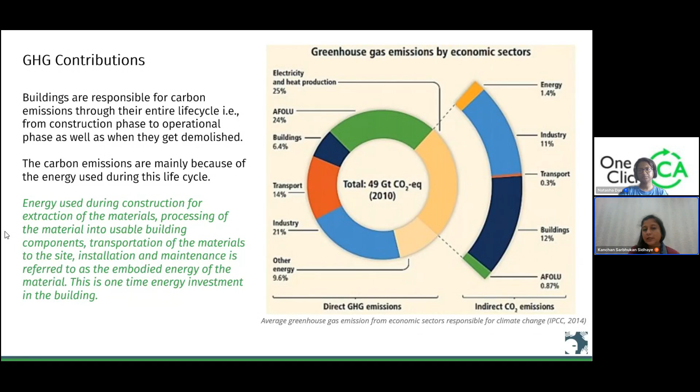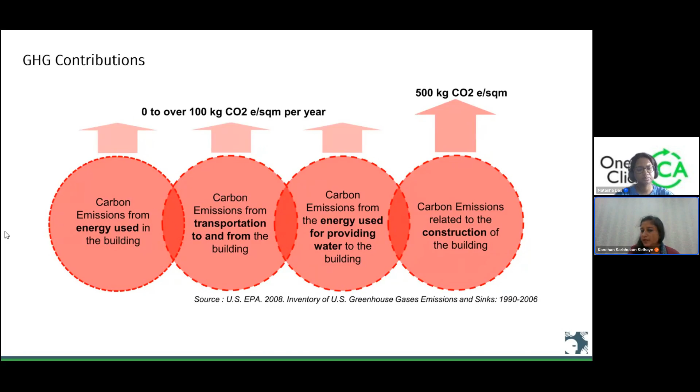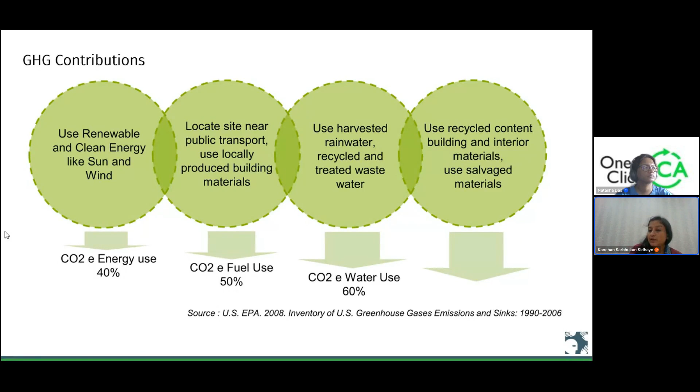GHG contributions in the building construction sector are caused by energy use in buildings, transportation to and from buildings, other resources like water or waste management, and the construction of the building itself. We can reduce this through clean energy offsets, using public transport, using more harvested recycled water, and in case of building materials, using more recycled content and more information on the CO2 footprints of these materials.

The life cycle assessment, in plain words, is an assessment based on a specific method of calculation governed by ISO standards 14040 and 14044, offering a scientific way to assess and start mitigating climate change. So one may say it is a first step, and carbon footprinting itself, as one of the parameters, becomes the first step as part of the LCA.

I would talk about the benefits and how to really use the LCA in real life scenarios. Typically, you will find a lot of product manufacturers, equipment or technology manufacturers talking about the life cycle impact of their product in a positive reference.

So how can one use an LCA? If you're a product manufacturer, you can conduct the LCA of your particular product and establish its base environmental impacts. Probably we are not yet at a stage where we are comparing products to each other, and if they are comparable, they're declared as comparable.

One set of users is product manufacturers, wherein any product that I'm manufacturing, be it in the construction industry or any other industry, I need to do my life cycle assessment and find out what my impacts are, including the GHG, including the carbon.

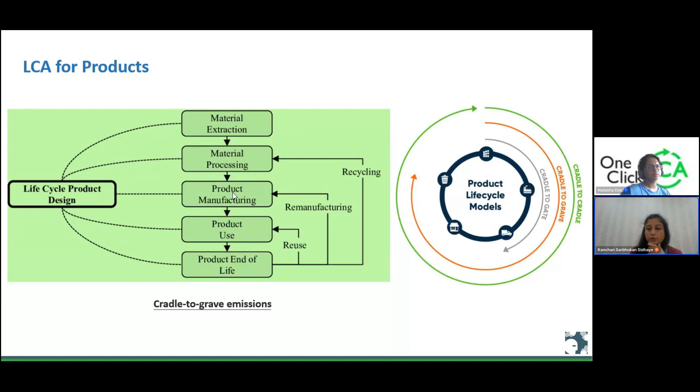So, like I said, there are various ISO standards for doing the LCA work, for reviewing the LCA work, and for the verification part of the LCA work. These standards are available for one to refer to and then work accordingly.

Now, in terms of LCA compliances, what we have come across is we categorize them as regulatory compliances and voluntary compliances. For example, SEBI has already mandated the top listed companies — I think around 1,000 to 2,000 now — to do BRSR, which is Business Responsibility and Sustainability Reporting. As part of this, scope 1, scope 2, and scope 3 emissions are required, and a lot of LCA work falls under the scope 3 domain.

That is where I think the regulatory frameworks have started asking for carbon footprinting of their products, particularly for manufacturing units. Another place where there is a regulatory interface with LCA work is EIA projects, wherein the MoEFCC, while granting environmental clearance to projects more than 16 lakh square feet or 1,50,000 square meters, will ask for a carbon footprint report based on LCA.

So basically, you would have to model your entire project or the BOQ, I mean all the major items used for construction, and find out what your embodied carbon footprint is, and then how you are mitigating some of it by using, say, recycled material, local material, etc. So that is again the kind of interface we have found on the regulatory side.

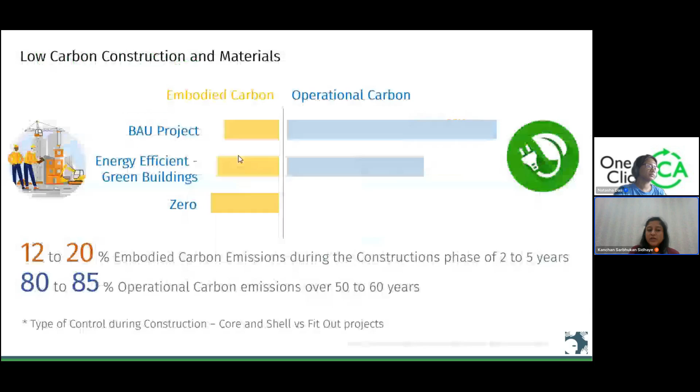Here is a visual representation for you of the life cycle assessment.

Like I said, the impact accounting actually starts from the raw material supply, which is A1. These are standard terminologies used all across. If you're already using any software for LCA, you'll also see these A1, A2, A3, right up to D, which is beyond the building life cycle stage or a recovery stage. You will see all these stages which are here.

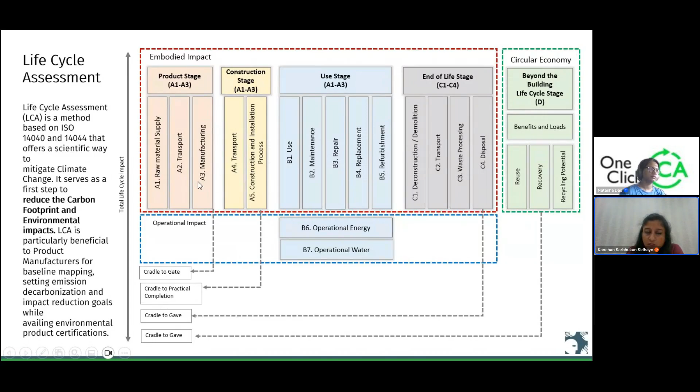Now, as a starting point, depending on whether you're a manufacturer or a proponent or a developer, you can pick which phase you want to implement, which is under your influence, and then work towards mapping of that stage. But the LCA typically will involve everything from raw material extraction, its transportation, manufacturing, its transportation to the construction site, its installation on the construction site, then the use phase of the material, and then the demolition or removal of that material from where it was placed back to recycling.

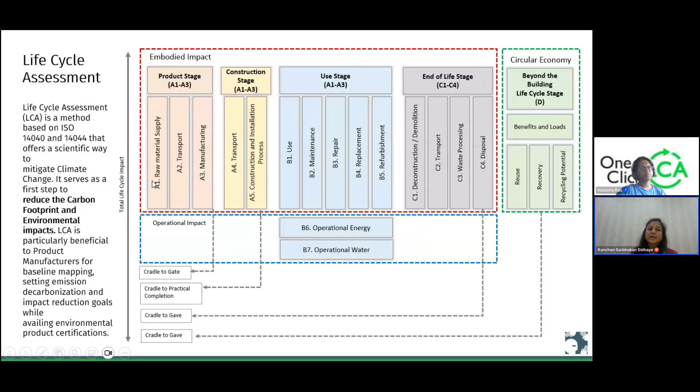So that is how even the software breaks your impacts into these gradual phases as the product moves ahead.

Now, how this is also related to scope three, I did mention that LCA is becoming a part of the scope three reporting of many entities. That is because the moment you create a new asset, a new facility, build a new building, or take in a building on lease and do the interiors, you are going to see a spike in the GHG of your organization, because you have invested into this project and consumed these many materials as a part of your scope.

So in the ESG domain, scope one and scope two, most companies have now completed their inventorization - that is scope one and scope two emission inventorization. And slowly, steadily, people are now moving towards the scope three inventorization. That is where all your goods, services, and assets fall.

And this spike in scope three is something you would be able to really control if you opt for low carbon options or low carbon emitting materials and components, equipment in either their manufacturing phase or their use phase - which you will know only when you actually ask for the LCA of this particular product or equipment.

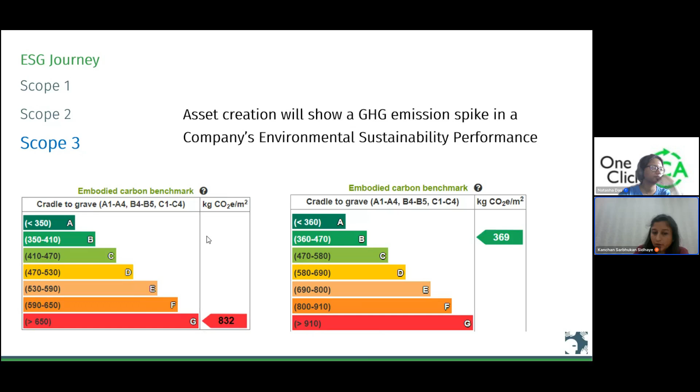So you would also find these embodied carbon benchmarks on the One Click LCA website, where whatever your model is will immediately be compared against the entire inventory that the software has, and it will also categorize where you stand.

Going ahead, I'd like to touch upon a little bit of the industry approach and LCA. So up till now, we saw what LCA is, how it can be used by different stakeholders, what is the scope of that LCA overall. But I'd really like all of you to see through the complexity of how it is to be done, and to keep it simple.

I would say that to make a real difference to a project, we could simply follow these four things given on the screen for the construction industry. First and foremost is avoidance through design - for example, architectural or structural design for material use optimization, dimensional planning to avoid purchasing extra materials, and C&D waste reduction with good skills and workmanship. What I'm trying to get to here is that our basics of actually building or executing a development in a sustainable way remain the same.

We are using LCA as a tool to probably make better decisions. For example, if there is a structural design scenario A versus scenario B, you can immediately prove the long-term LCA impact, and in connection with your ROIs and financial calculations, it is a more convincing way to go forward. So LCA can actually be used as a tool for decision making, to push projects towards avoidance of unnecessary installations.

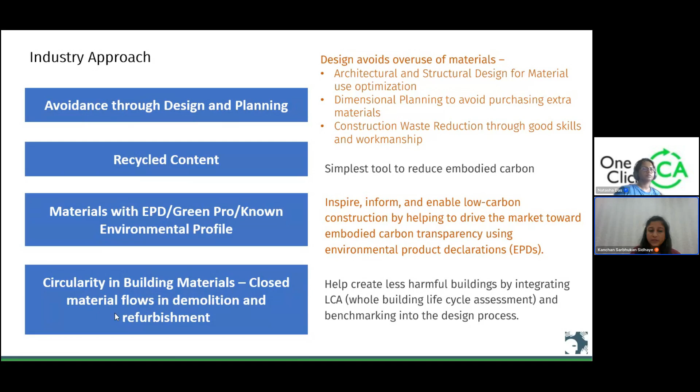So when we look at LCA as a tool for decision making, there are two differences we have learned over time. One is the choice of material based on its own LCA impact - these are materials which just sit with the building. They do not really influence the performance or ongoing operational performance of the building. So these are just going to be there with the building, right?

So would you now, based on this, say okay, let's not do a DGU because it is a high embodied carbon material, and let's go with single glass? My God, the DGU is thrice - so I cannot base my decision simply by looking at the embodied carbon numbers.

I'd have to look at how it really affects my operational phase. For example, the DGU is going to save my operational energy to a very large extent, over the life of the project - maybe 30, 40, 60 years, which we assume as standard. So I also have to consider the use phase while making this decision today, even if single glass looks lesser to me in terms of embodied carbon.

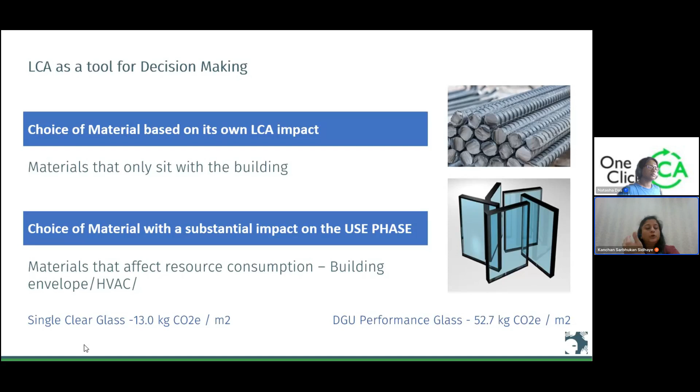So this is something to really remember - how to categorize your materials, and which are the materials where you can straight away compare impact to impact and go ahead with your selection, and which are the materials where you need to consider the use phase or further phases in the life cycle while making that decision.

So if I were to do any decarbonization strategies, I know which are my priority areas, which are the areas I need to decarbonize first. And it's most likely that these also have high costs. So basically, it's a win-win situation where we try to save any resource using LCA - it also adds to my profits and reduces my environmental impact.

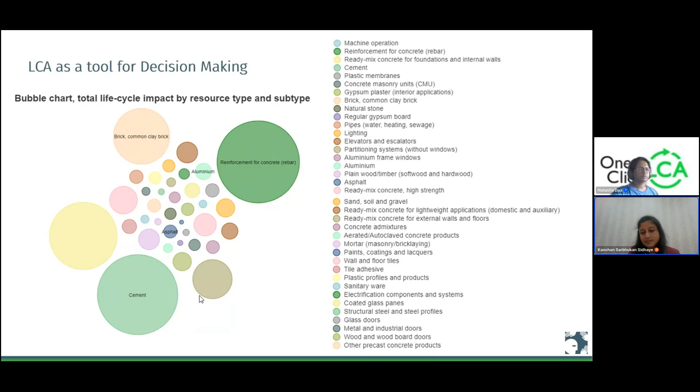So that is how the interpretations from one-click LCA can actually be used in order to make a change - gradual changes, project by project, material by material, process by process, in any of your roles that you're playing.

Now, there are a lot of questions about whether this value is less or more. Currently, there is no benchmarking for whether this is less or more, in terms of just the embodied part of it. We have benchmarks for operational energy, like EPIs or comparisons with ASHRAE standards, where operational energy consumption is benchmarked. However, there is no benchmark for embodied carbon in various sectors or types of buildings.

So I feel there is a need for standardization of embodied carbon lists. For example, if you are doing a project and I'm doing another, we need a standardization of this list - maybe the top 10 most important materials in the residential segment or the commercial segment, which we need to fix. Mostly from our studies, we know it is not more than 15 to 20 materials which we need to prioritize and push.

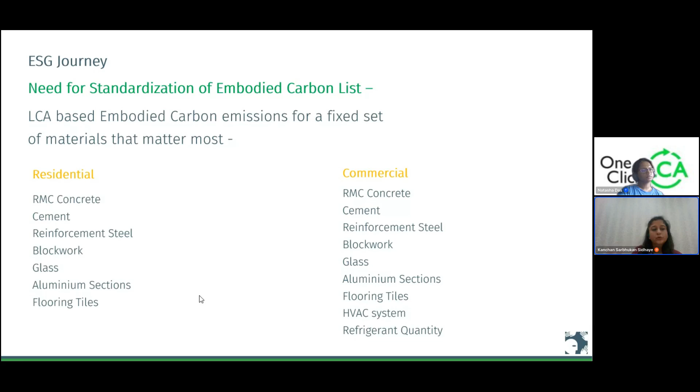Of course, every material and every installation matters, but as a starting point, if across your projects you have a fixed list of materials or components, it will be easier for you to compare and create your own benchmarks, which is actually the need for the industry today.

So when making a better choice, of course, you have various materials available. For example, for aluminum, you will find aluminum which is 4 kg CO2e per kg up to 9 kg CO2e per kg of aluminum. Whether there is a cost difference, and whether the manufacturer has made it carbon neutral, is something you can find only from the data disclosed by each manufacturer.

With concrete, which is the highest of all in the construction industry, you will see it starts with almost 396 kg of CO2 equivalent per cubic meter. Here we've assumed M35 concrete with only the typical 10 or 15% fly ash mix. But when you do 60% GGBS in the same concrete, it halves, almost becoming 172 kg CO2e per cubic meter. Further, when you look at carbon neutral concrete products, there are companies who have reported this value to be minus 25.9 kg CO2 per cubic meter of concrete. So that is how a manufacturer can influence a carbon negative material, or report carbon negative materials, to get preference by projects which want to reduce their scope.

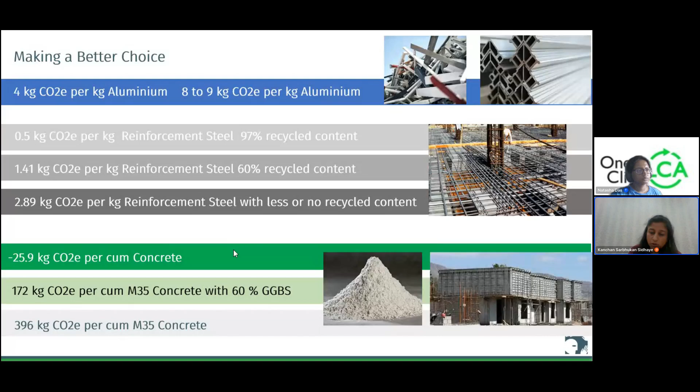So you could take any material and research it based on the inventories that are available, based on One Click LCA data available to the Indian market, and see if you can make a better choice in each of your projects.

So typically, the first thing would be to get an LCA done. This is particularly for product manufacturers, where the first thing is to do the LCA, the next thing is to probably get a GreenPro rating, and then go ahead with the EPD. That is the course a product manufacturer would follow.

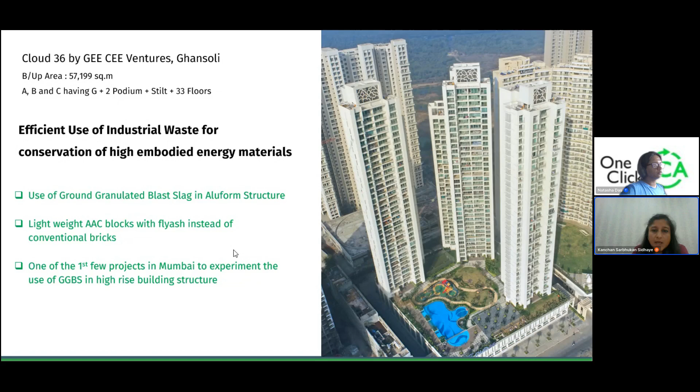These are a few projects where we used GGBS, high-rise projects where GGBS was used. These are by default green building projects, which ended up saving us a lot of cost and a lot of material.

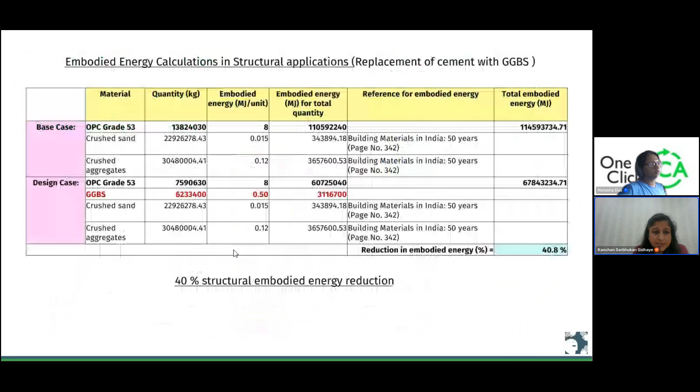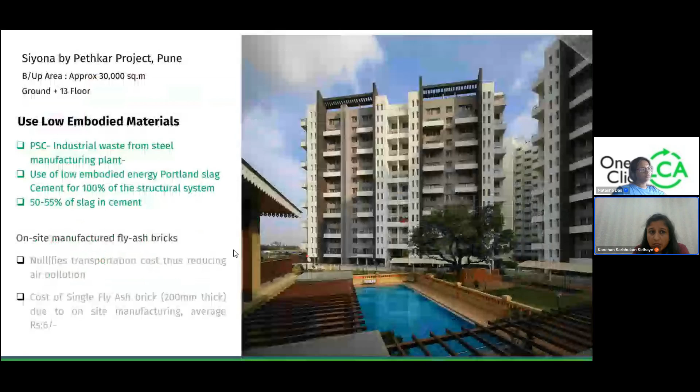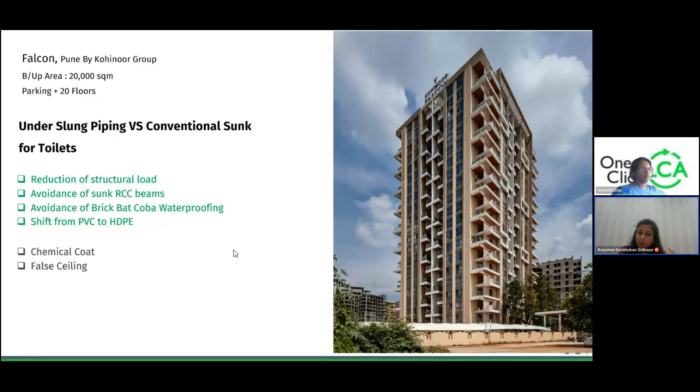Then another case example where instead of doing the conventional brickbat sort of filling for toilets and restrooms, we used slung piping, which landed up saving us quite some structure. So again, the estimations for this.

Now, the open-ended part of the discussion that I'm coming to.

Natasha, how long do I have? Because I think I have quite a few slides left. We have another 10 minutes. Great, it's good, yeah yeah, okay.

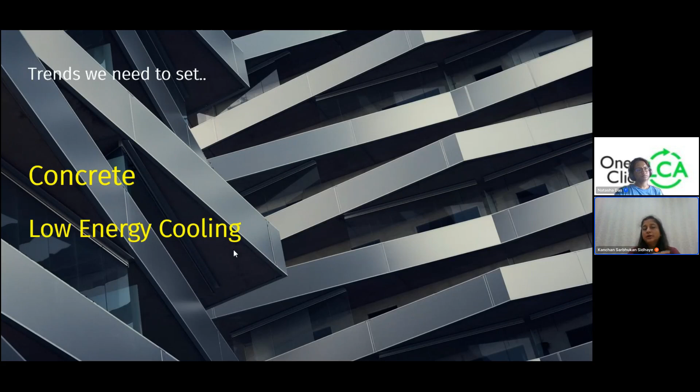Okay, all right. So based on our analysis and experience in the industry till now, what we have gathered is there are two focus areas where we need to look at. One is concrete and how to decarbonize concrete or reduce concrete. So if any of the projects land up saving cement or concrete, they will definitely make a big difference to the decarbonization at a large level.

And the second part is not a part of the embodied carbon, but a part of the operational carbon is low energy cooling system. So mainstreaming low energy cooling system is another area where you can make a double effect.

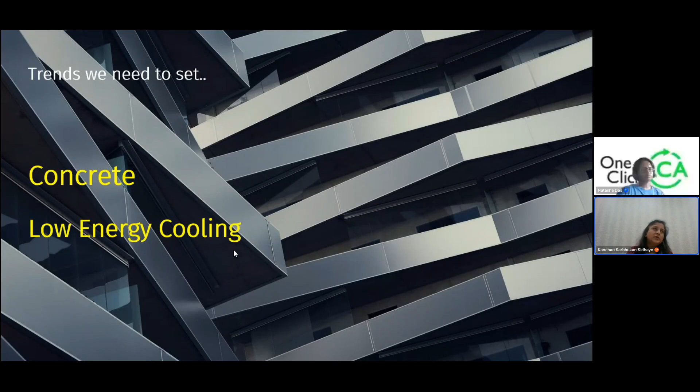One is the operational energy in a low energy cooling system is almost one-eighth, if not one-tenth of a conventional air conditioning system, and two, the quantity of refrigerants that a typical air conditioned project would use would be way higher. So all of these CFCs, HCFCs, which are not now used, but HFCs and the new age refrigerants coming, if they could be reduced to a good extent, their direct impact on climate change is going to reduce. So the benefit is twofold.

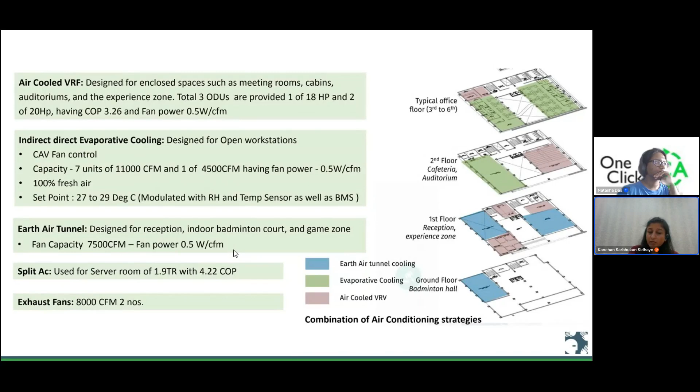These low energy cooling systems can also be modeled using one-click LCA, and their long-term impact on energy can also be modeled on one-click LCA. So for everybody's reference, you can toy with your demo versions maybe and check out.

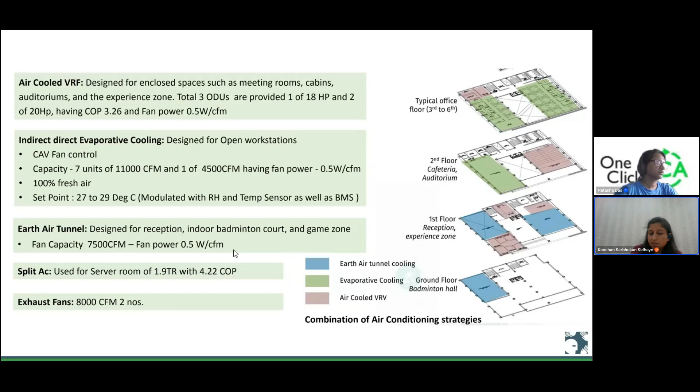So here we've used a combination of systems and not just a conventional VRF sort of system. We've done a direct and indirect evaporative cooling system with the earth air tunnel, which has reduced our HVAC installation substantially. So instead of needing 1 TR for just 250 or 300 square feet, we've landed up installing 1 TR for 625 square feet.

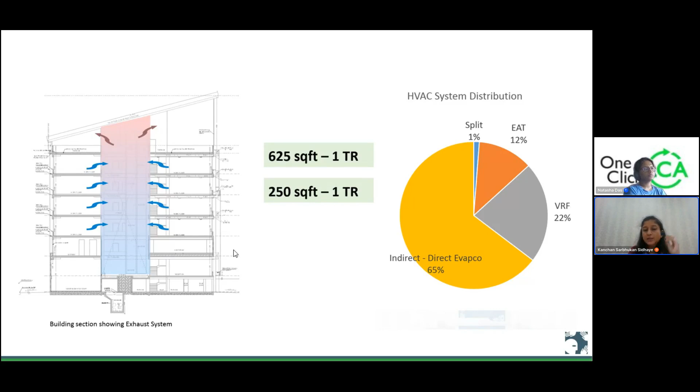That is the power of climate responsive HVAC design in alignment with climate responsive architectural design. So while we are learning about LCAs, I want to bring to the forefront that design itself is a powerful tool for avoidance and reduction, and it can very well be justified using your life cycle assessments. So these are a few quick images of the project that I wanted to show.

And then we go to the new age carbon negative materials. So any of the bio-based materials that you use, it could be mycelium insulation, which is derived from a plant source, it could be lime, it could be any grass-based board. Recently we bumped across a board called Safe Board or Desert Board, which uses date palms basically to create plywoods.

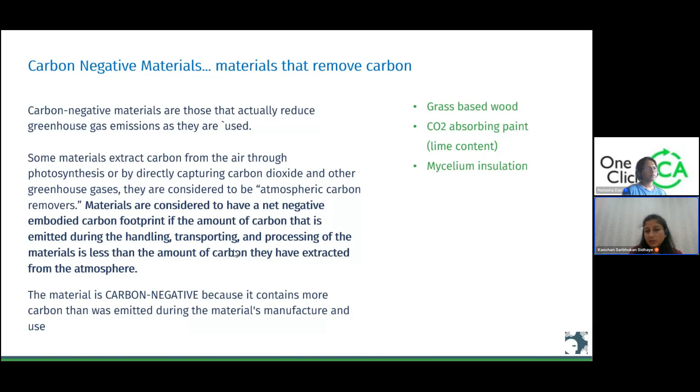So any sort of bio-based material is going to capture, is going to negate, and they're going to be called carbon negative materials. So wherever you have the opportunities to use these kind of materials, they're going to hit that minus sign on your carbon footprint inventory. Latest, open for research and something that even I am looking at, and all of you are welcome to look into it, is the latest IPCC report says that over the lifetime, concrete structures absorb back 50% of the CO2 that they emitted during production. So some research shows 30%, some research shows 50%.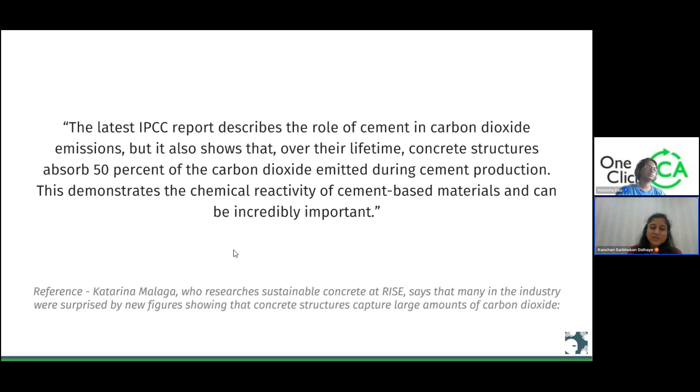But again, a very interesting question to pose to industry, especially when concrete is the largest contributor overall. So I think that is all from my end. I hope in these 40-45 minutes I could interest you and take you through some of the experiences we've had while working in this sector.

If quickly you would want me to also show how the one-click LCA report looks. Yes, you can go ahead, Kanchan. Sure. I'll just reshare my... Yes, you just have to reshare the screen again.

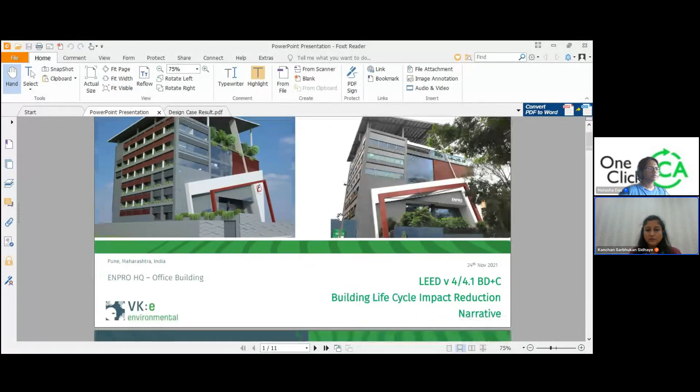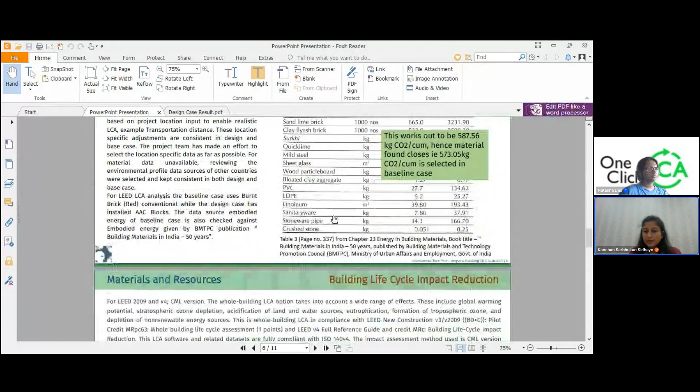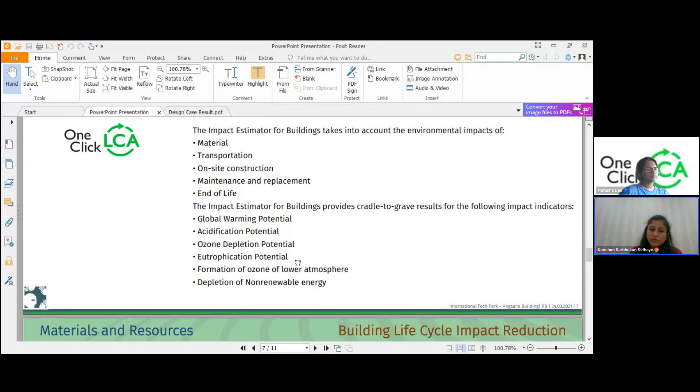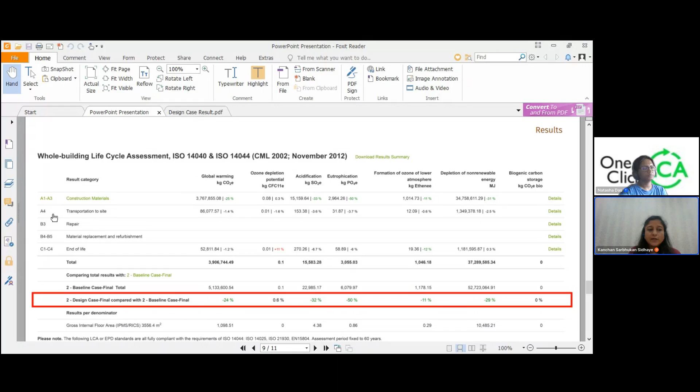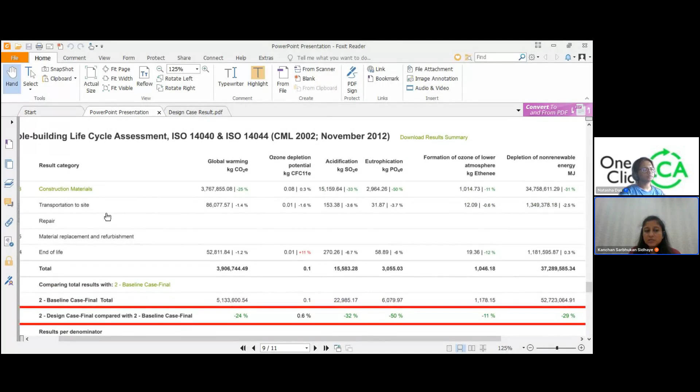So when you model this on the dashboard in one-click LCA, you model your base case and your design case. You get your values based on whatever measures you have taken to decarbonize. For example, the measure could be as simple as using a material located very close to your site. So it's going to reflect, if you can see my cursor here at A4, transportation to site. The more accurately you model all your quantities, your distances, and whatever goes into the project, the software will have the capability to map that very nicely for you.

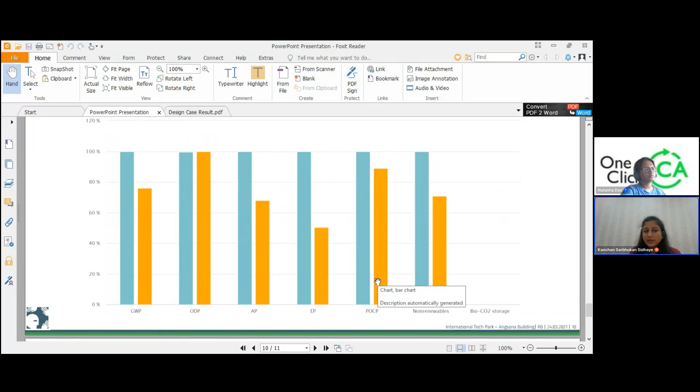Also in terms of representation, the baseline case versus the design case, LCA impact estimator, these are all the impact categories in different forms, like GWP, acidification, eutrophication, etc. So you will also get quick comparisons of your baseline versus your design case.

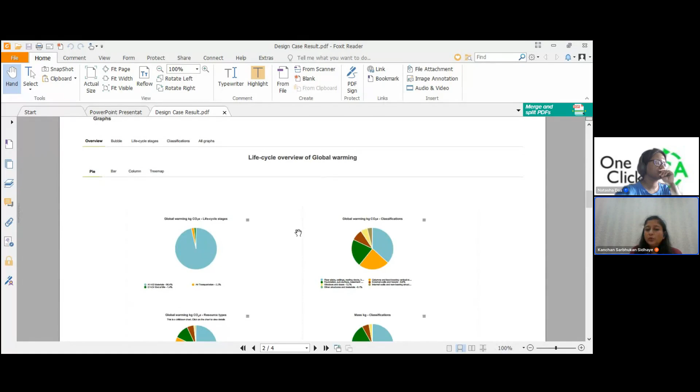And the actual extracted report will look something like this that you see on your screen right now. It's a long report, and you can get which one's the highest one. So if you see here, the most contributing materials is the RMC, then reinforcement steel, then again a certain grade of RMC, and so on. So you can check which is your most contributing element, which is your most contributing component in the building, and get an exhaustive report like that.

So yes, that's all from my end, and I hope I have been able to share what we've been doing, and how you can also take it up in your own practices, in your own capacities, because the sky's the limit here. You can use LCA for any sort of positioning that you may be in the industry.